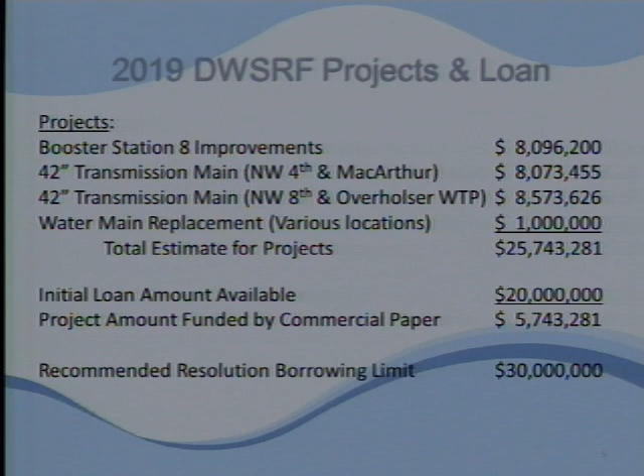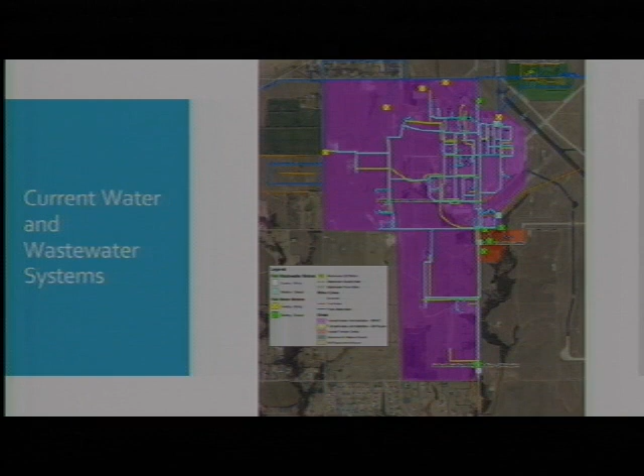This means on the private side of the system, there was about 13 miles of water system and about 7 miles of wastewater system currently being maintained by the utilities department. So what are the challenges, and why do we do this study? The FAA has federal mandates to track water usage and reduce operating costs, but they're not able to track where water is being used on campus or which buildings are using it. Operation, maintenance, and repair replacement on the private side doesn't fit within our current service categories, and there are difficulties and confusion with billing.

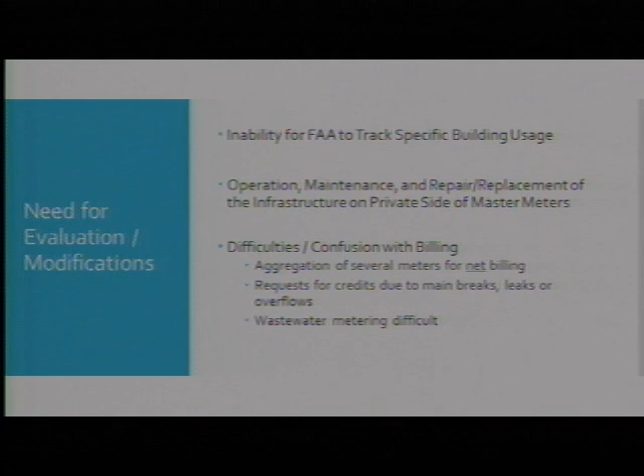Aggregation of meters for net billing is a very complex thing that we don't have to do for typical customers. We would receive requests for credits for overflows, main breaks, or leaks, and also wastewater billing difficulties.

So the two options we looked at were: option 1, a retail system, and option 2, a modified master meter system.

On the retail system, here's the current situation with the meters. We would take off the locations where we have master meters, and the deduct meters would then become normal service meters. The water system inside the complex that would normally be ours would become part of Oklahoma City's water system, and the wastewater system would become part of Oklahoma City's wastewater system. We would install water meters at those red dots, the points of use. It's about 74 meters total for the complex, with an estimated capital cost of a little over $1.5 million.

Option number 2 takes the master meter complex in. Rather than having flow go through their system to another entity, we would have to extend the water system to serve the Federal Transfer Center and the FAA Southwest region. The estimated capital cost for that extension is about $1.9 million.

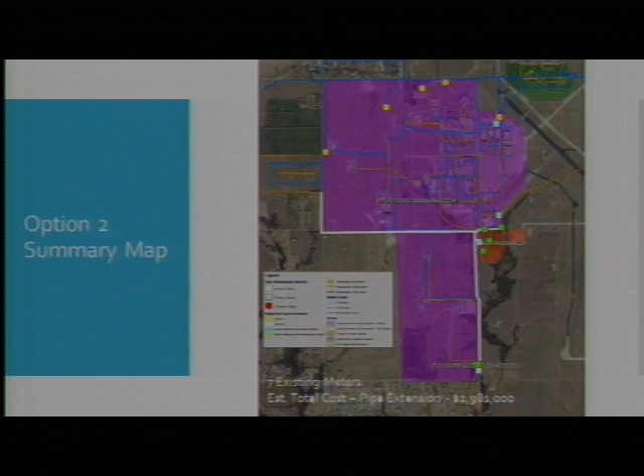The benefits of option 1 are that it's a lower cost option than option 2, and it gives the FAA the ability to track water usage at their individual points of use, so they can meet the executive orders they need to for conservation. The service would fit within our typical rate classes, and there would be no additional O&M or capital costs for the FAA complex - they would just be part of normal rates.

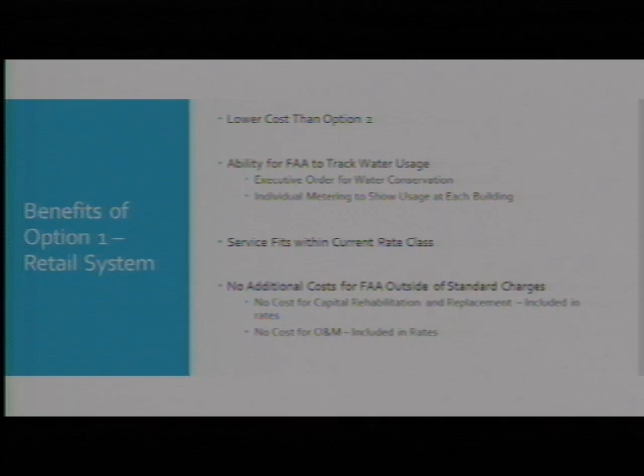And with that, I'd be happy to answer any questions you guys have regarding the study. Any questions? Thank you.

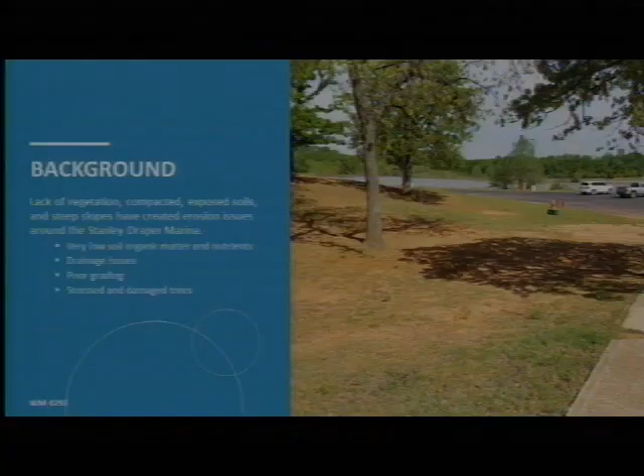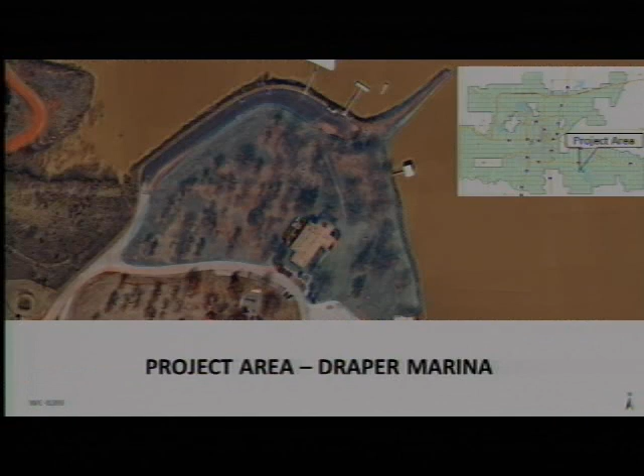So the project area I have highlighted in blue is around the marina. It's a little more than 5 acres and includes the breakwater area. You can actually see from the map how eroded the soil is underneath those trees.

The plan is to restore the soil using compost to improve its quality so it can grow vegetation. We're going to install native and adapted plants on the site so it can filter and have additional root structure to keep the soil in place. There are plans for a walking path to help slow down the water and reduce sediment runoff, with plants along that pathway to filter out any sediment that does get lost. It's also a good demonstration of a functional water-smart landscape, and it serves the purpose of protecting the reservoir's water quality.

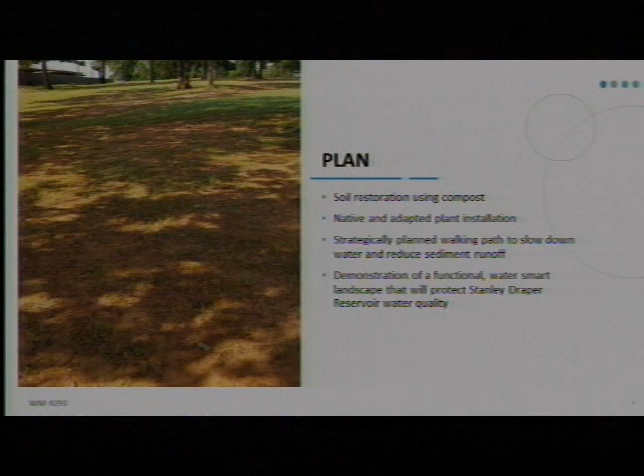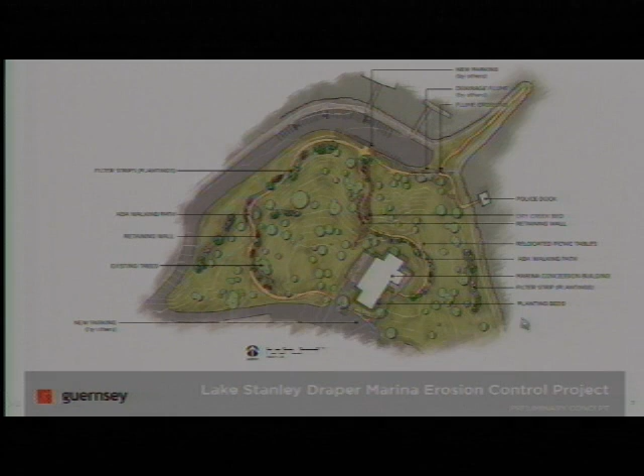This is a rendering concept of the project put together by Guernsey, showing where the walking path goes with filter strips and plantings around it. There's also going to be a dry creek bed to help get water to where it needs to go correctly, instead of running off the slope and down into the reservoir.

So that's all I have. If you have any questions, I'm happy to take those. Are there any questions? Then Larry's going to talk about the other projects at Draper.

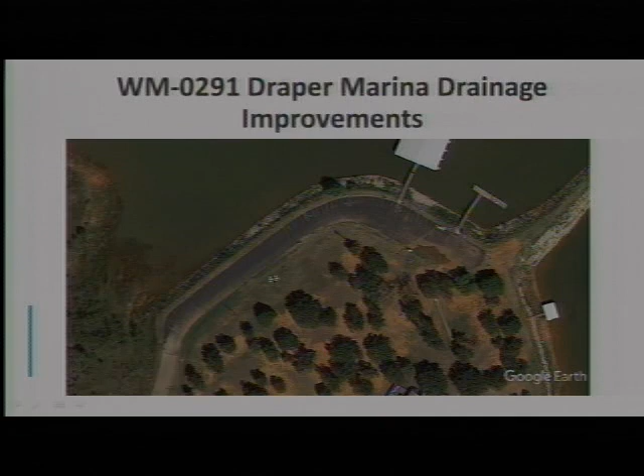In conjunction with the projects Mallory is working on, we've got a drainage improvement project on the north side of the point where the erosion control project will be, because we have a large amount of water puddling in the parking lot in several different areas. One of the main issues is that there's an existing culvert running along the side of the parking lot that has been filled in due to erosion coming off of the point.

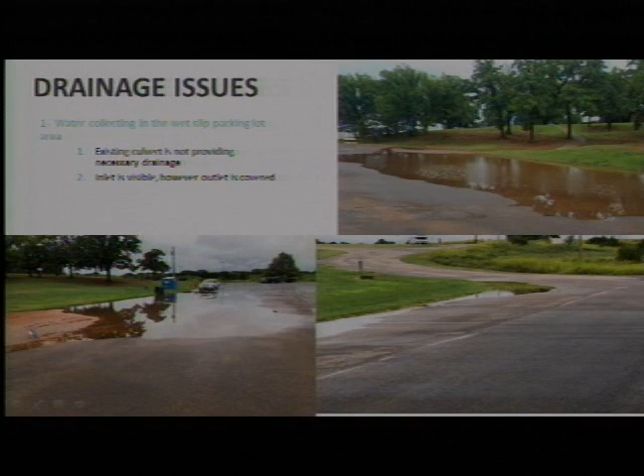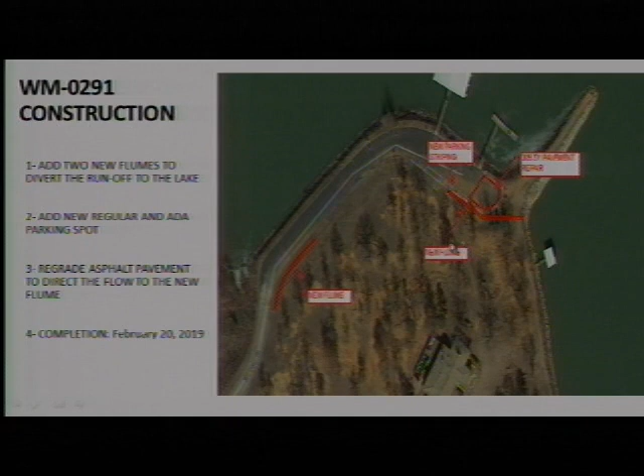So in order to correct that, we're going to build 2 new concrete flumes in this area. This will draw water to this culvert to bring to the lake, and this one will bring water from the parking lot and surrounding area to this point. We're also going to add additional parking striping, including ADA parking, and address the puddling issue by regrading this asphalt to direct the flow of water to this flume. We anticipate completion of this project by February 20th of next year.

A side project not on the list, kind of a sneak peek, is that we're going to add additional parking and a new road along the south side of the point. We're going to add about 55 new parking spaces and some ADA spaces, as well as improve drainage in this area with 2 new pipes. This road will be a two-way road that abuts the recently completed trails in the Draper area. We anticipate awarding this contract in February and completing it in May of next year.

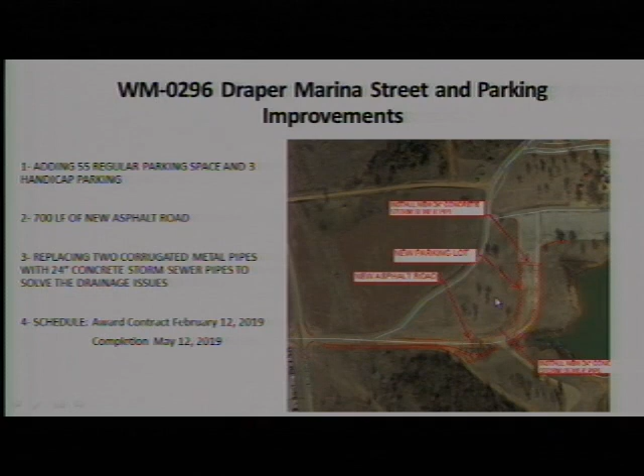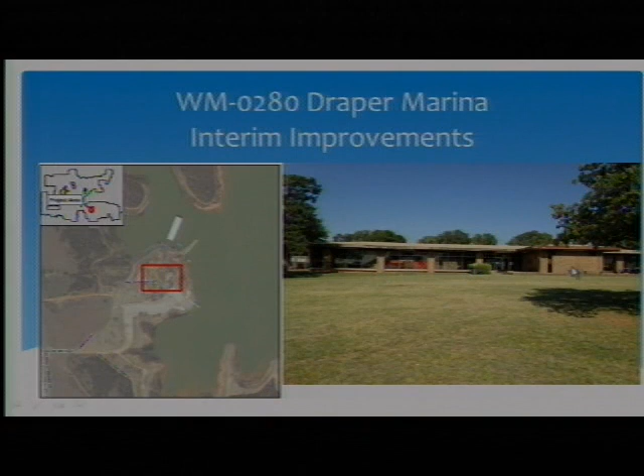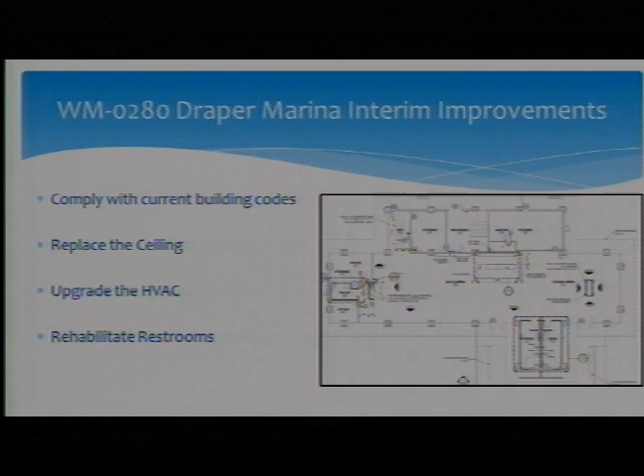Now on to what we call the star of the show, the actual marina building itself. These are interim improvements that bring the building up to code. Highlights include replacing the entire ceiling, upgrading the HVAC, and renovating the bathrooms inside. On the exterior, we're going to provide improved parking on these 2 sides, pavement improvements, as well as sidewalk and pathway improvements to meet ADA compliance. We anticipate this project to be completed by April of next year.

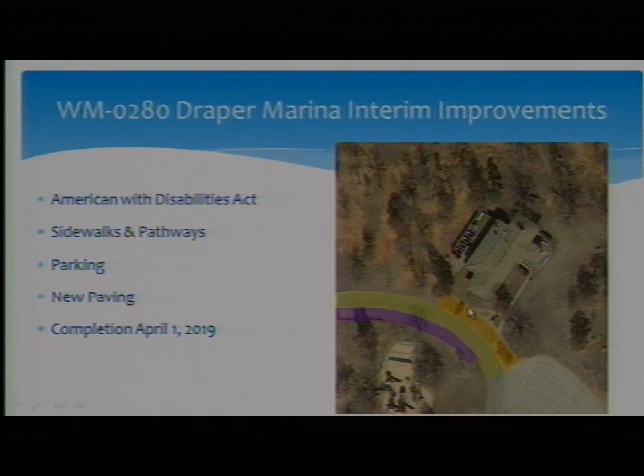And with that, I can take any questions. Are there any questions? Mr. Chairman, these are a few of a number of projects that we are planning for Draper.

If you recall the first photograph Mallory put up, the color of the water was pretty bad. There were a number of roadways along the lake bed that we've closed. We're getting a lot of erosion and sediment coming down from the hill where the concession stand is located, plus the parking area is inadequate in 2 ways: it's too small, so people are parking on the dirt, and it's severely deteriorated. So we're getting a lot of sediment into the lake, which causes our treatment costs to go up significantly.

If you notice the later pictures Larry was showing, the water color is pretty clear. When it doesn't rain, the color of water coming from southeast Oklahoma is really good, and here lately the lake's been relatively clear. So we need to continue these soil erosion projects to keep sediment out of the lake so our treatment costs are reduced. All of these are funded through ratepayer dollars, not non-rate dollars, with the exception of the upgrade to the concession stand, so we can lower operating costs and improve the integrity of the lake. These are just two of several projects we've developed to help in that regard.